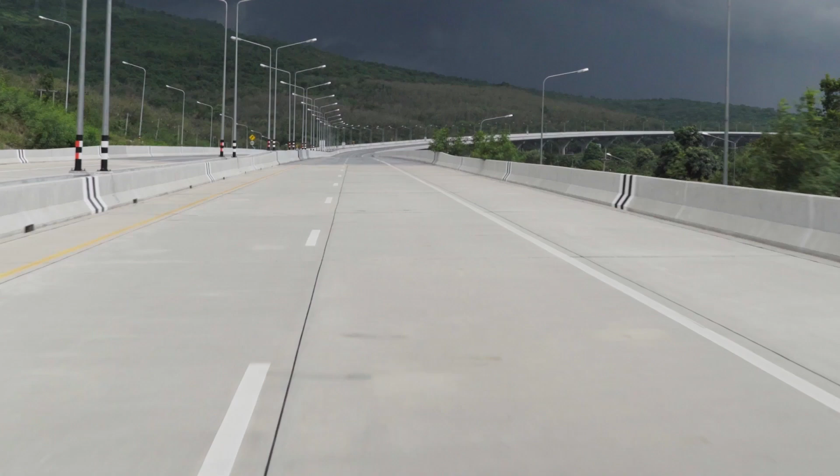The Department of Highways is the main agency that oversees the highway network throughout the country. Currently, the Department of Highways has almost 78,000 two-lane kilometer routes, consisting of approximately 70,000 kilometers of asphalt surface and around 7,600 kilometers of concrete surface, and only 62 kilometers of unpaved surface.

The Department of Highways takes into account the convenience and safety of road users. To be more precise, we focus on the smoothness of roads because it plays a significant factor in making road users convenient and safe.

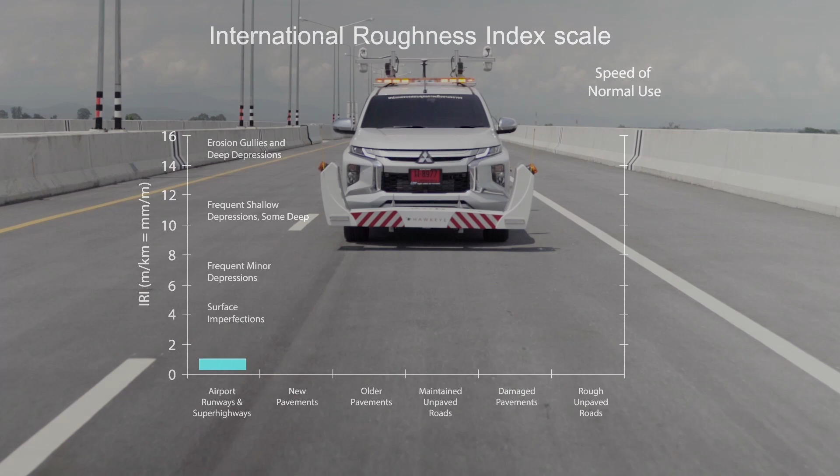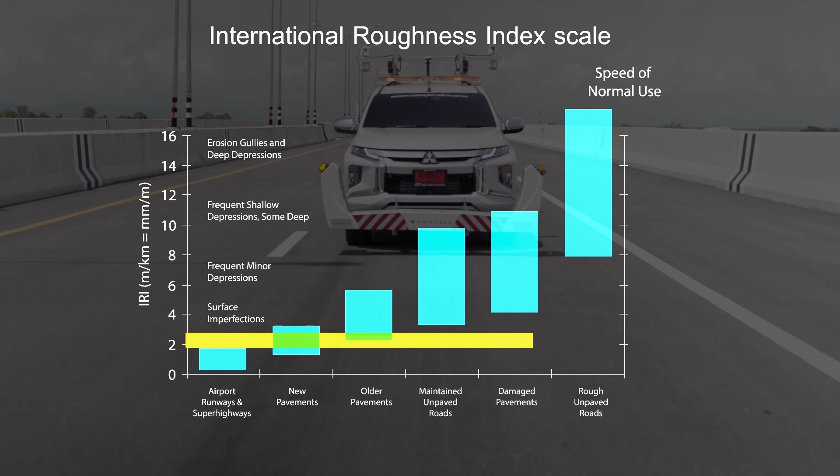The International Roughness Index (IRI) is an index used to determine the roughness of the road surface. It can indicate the overall surface condition of the pavement from the results of the total vertical level change divided by the total horizontal distance while driving. The IRI is very well known and used by many countries in pavement management and is also acknowledged by the World Bank.

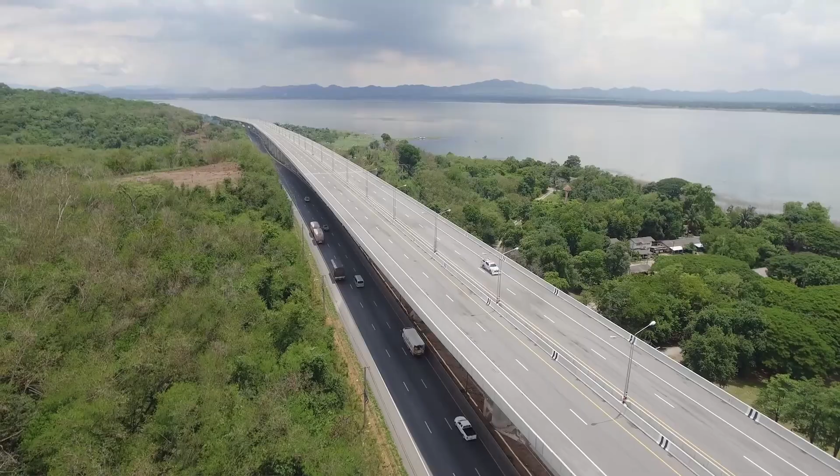Generally, IRI for newly constructed roads ranges from 1.5 to 3.5 meters per kilometer. The acceptable IRI requirements, however, vary from country to country. It depends on the policymakers and the budgetary allocation for road infrastructure. As for Thailand, the Department of Highways requires newly constructed roads to have an IRI not greater than 2 meters per kilometer for asphalt pavement, and not greater than 2.5 meters per kilometer for concrete pavement.

In order to measure IRI, an accurate and efficient instrument is required for such a mission. Fortunately, high-tech devices like the laser profiler are brought to inspect roads, which help us overcome former issues such as time-consuming inspection.

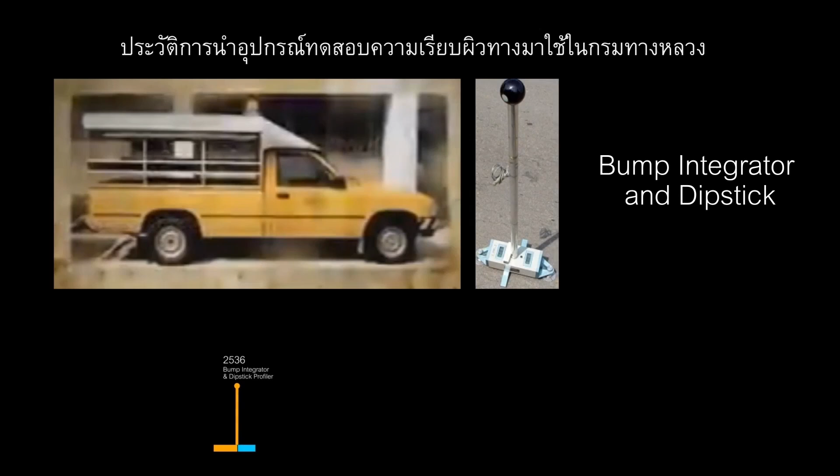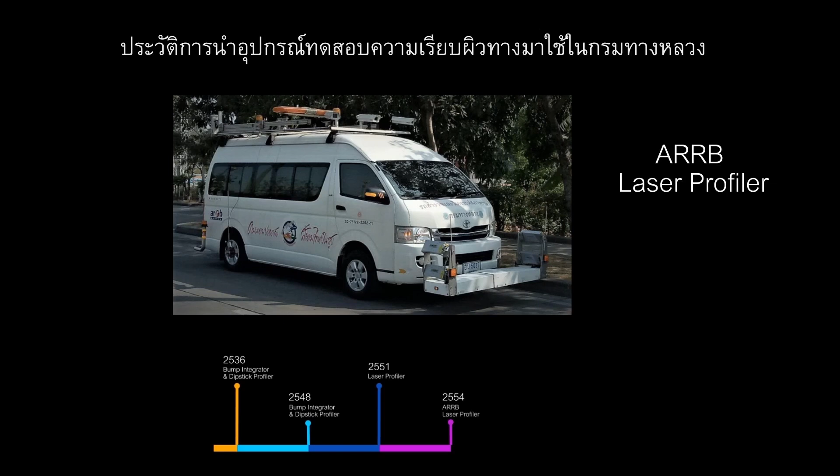Since 1993, the Bureau of Materials Analysis and Inspection has utilized equipment such as the bump integrator and dipstick profiler for surveying road roughness. The Class 1 laser profiler had just been invented in 2011 and has been widely used by the Bureau since then.

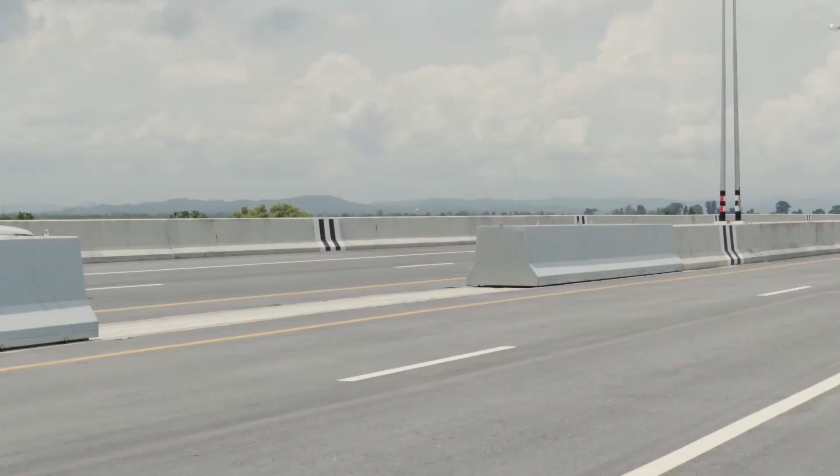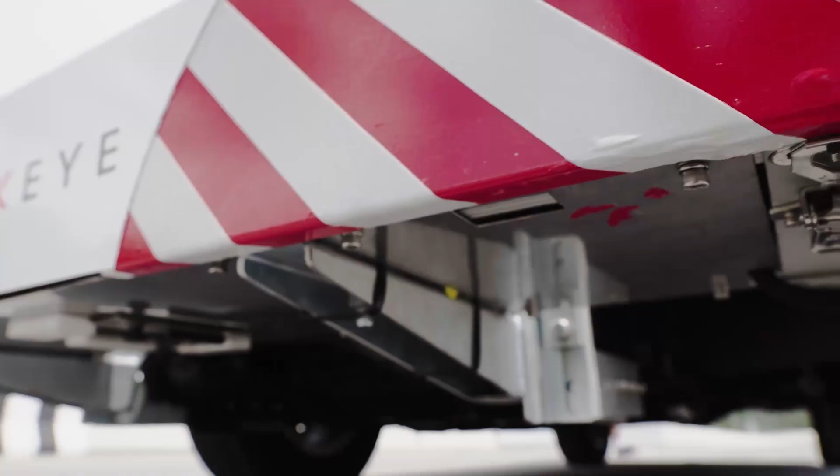The latest pavement surveying device developed in 2021 is from the Australian company ARRB. The Hawkeye 2000S series, which is a Class 1 laser profiler, is installed on a 4-wheel drive small truck, able to meet the needs of the Department of Highways effectively.

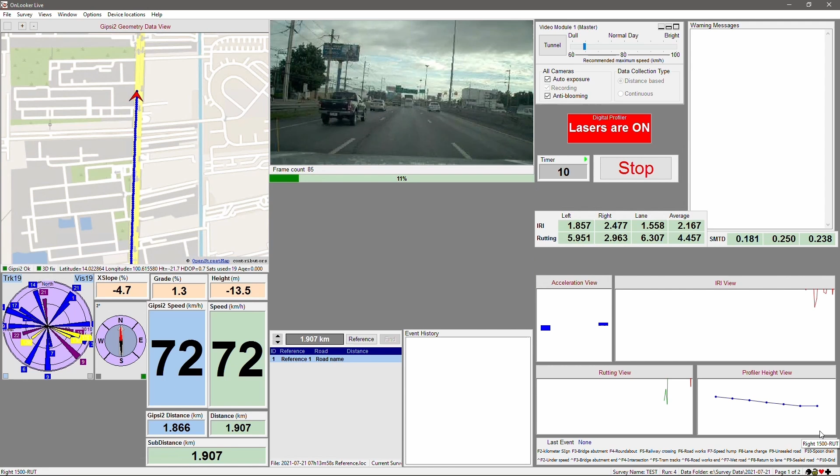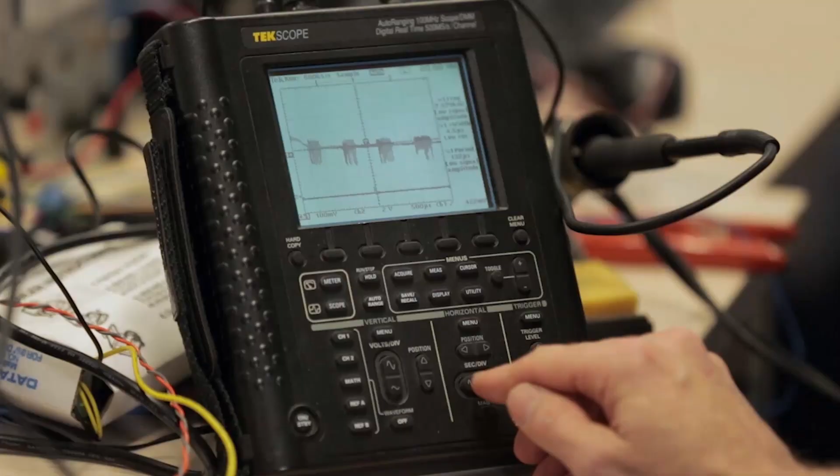The vehicle used to survey and analyze asphalt and concrete roads can record damage data on the pavement. It collects data for analysis using a laser profiler to measure pavement roughness in terms of the International Roughness Index (IRI), according to the American Society for Testing and Materials (ASTM), the professional association of science and technology that defines and establishes standards globally, namely ASTM E950, ASTM E1845, ASTM E1703.

The laser bar installed at the front of the car consists of an accelerometer and a laser, the Class 1 monitoring device with a beam size less than 1 mm. This device will shoot a beam of light onto the pavement to collect IRI, rutting, and MPD data.

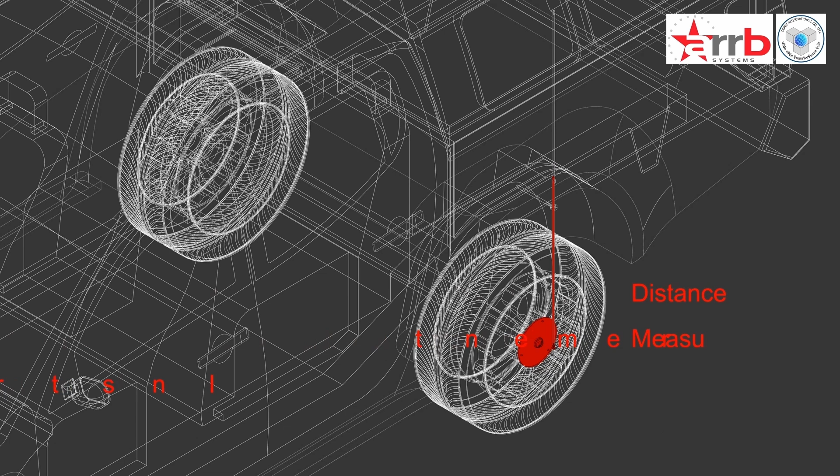This distance measurement instrument mounted on the side of the rear is used to measure speed and distance with a resolution of 2000 pulses per revolution and an error of 0.1% depending on temperature and thermal expansion.

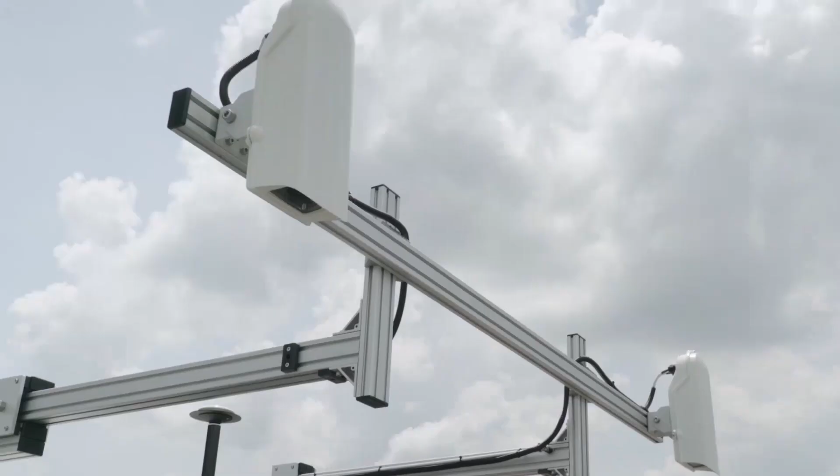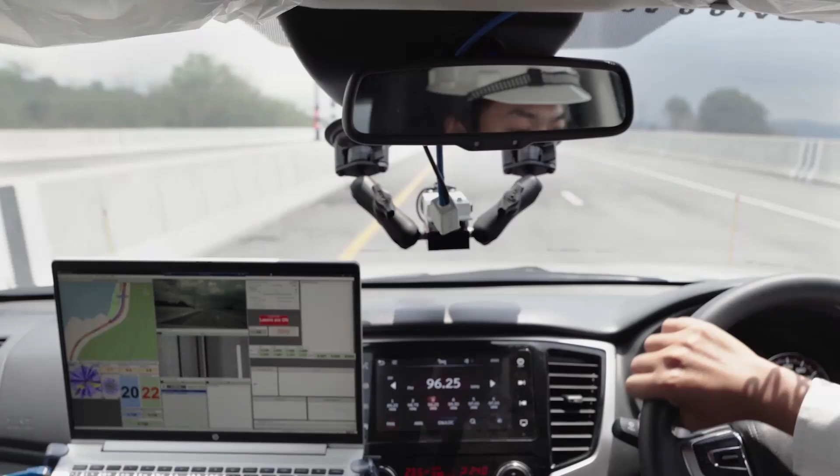There is a beam mounted on the top of the car's roof for a GPS receiver and a high-resolution rear camera to capture pavement failures such as cracks, potholes, etc. Furthermore, a front camera is set in the front of the vehicle for capturing high-resolution images of assets such as traffic signs, electric poles, milestones, and so on.

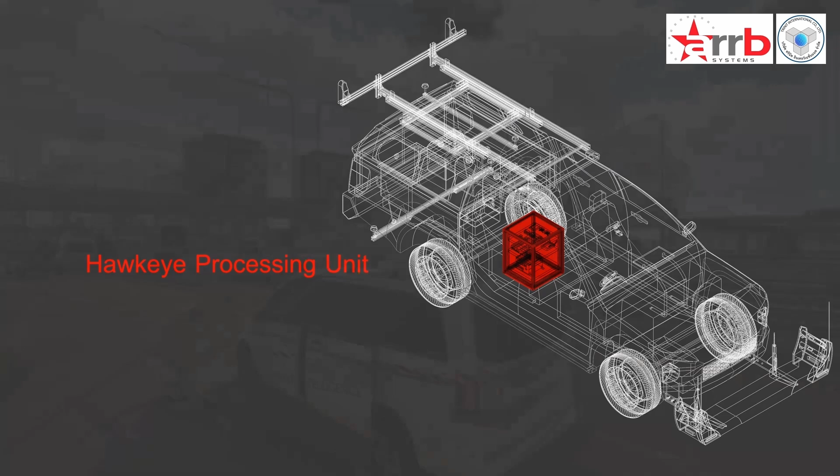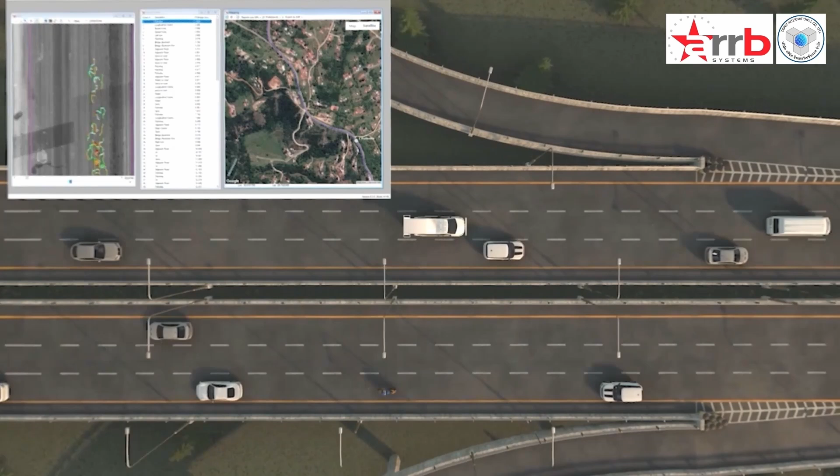The control cabinet is the device controlling the operation of the Hawkeye 2000S system. It collects data from each device to display the values via the program. Gipsi-Trac consists of two receivers used to receive signals for geocoding along the road surveys. It can also collect geographic information such as gradient, crossfall, and radius of curvature of the road.

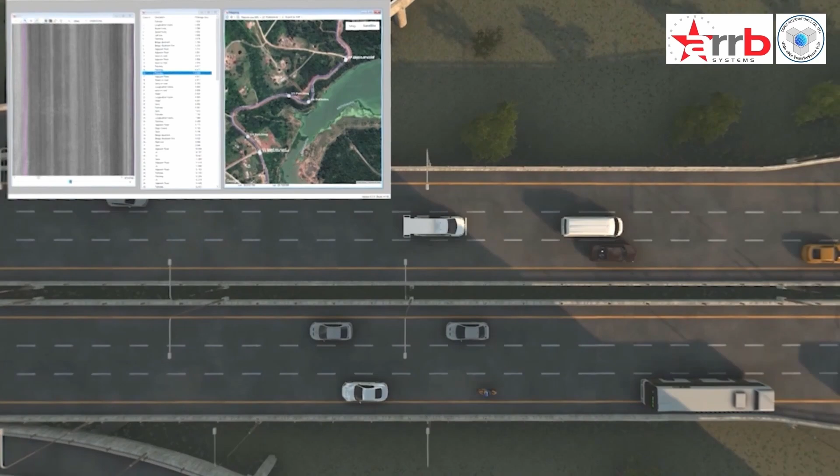When the laser heads shoot the beam of light to collect data, the cameras will capture images at every specified distance. Then, the data will be sent to the control cabinet for processing and then displayed on the screen.

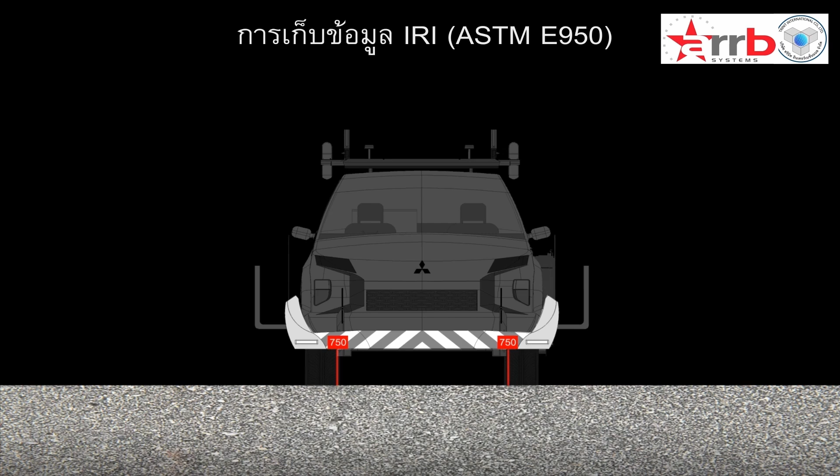According to ASTM E950, IRI data collection is a measurement and data acquisition standard using two Class 1 lasers in combination with a wheel-mounted accelerometer.

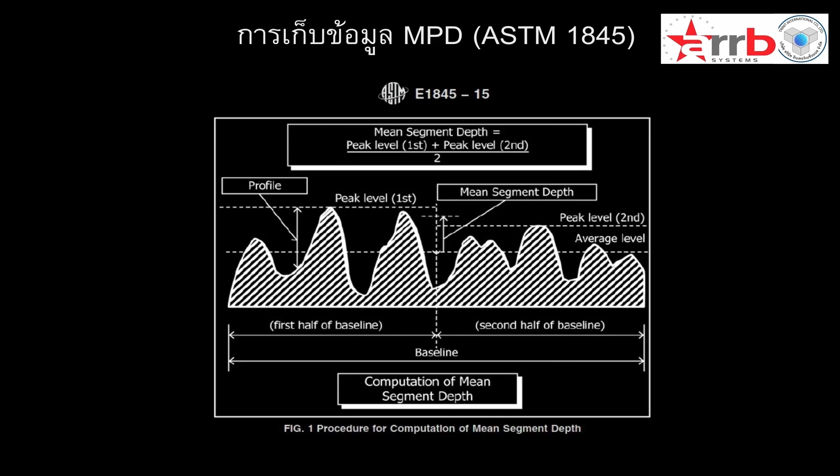With ASTM E1845, MPD data collection must have a laser beam size of no more than 1 mm, and survey data is collected every 1 mm by collecting data over a distance of 100 mm. The obtained values are then divided into two intervals, and the peak value is taken into account in the formula, which will provide the MPD value.

According to ASTM E1703, rutting data collection is data collection using the lasers. The obtained values from each laser were calculated to get the rutting values of the left wheel path and the right wheel path.

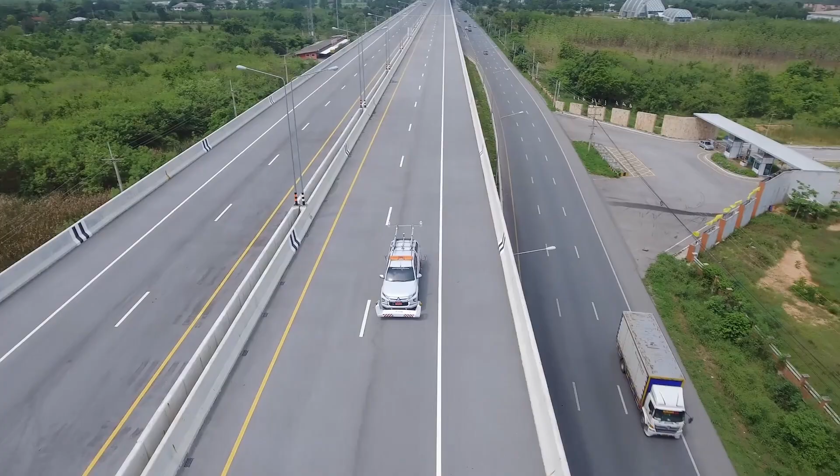Road geometry measurements are processed by the Hawkeye 2000 system equipped with Gipsi-Trac that measures road geometry data, namely gradient, crossfall, radius of curvature, and vertical curvature of the road, which will work as follows.

Firstly, gradient. The system measures the change in inertia from the 3-axis accelerometer in combination with a distance measuring device or DMI to convert it into a change in angle or percentage so that it can indicate how steep the road is at that point.

When the front of the vehicle is higher than the back, like a car going uphill, it will show a positive value. If the front of the vehicle is lower than the rear, like a car going downhill, it will show a negative value. The unit of gradient is in degree or percentage, depending on the measurement unit selected.

Secondly, crossfall. The system measures the inertial changes from the 3-axis accelerometer in combination with running direction measurements from the 3-axis angular velocity device to convert it into a change in angle or percentage.

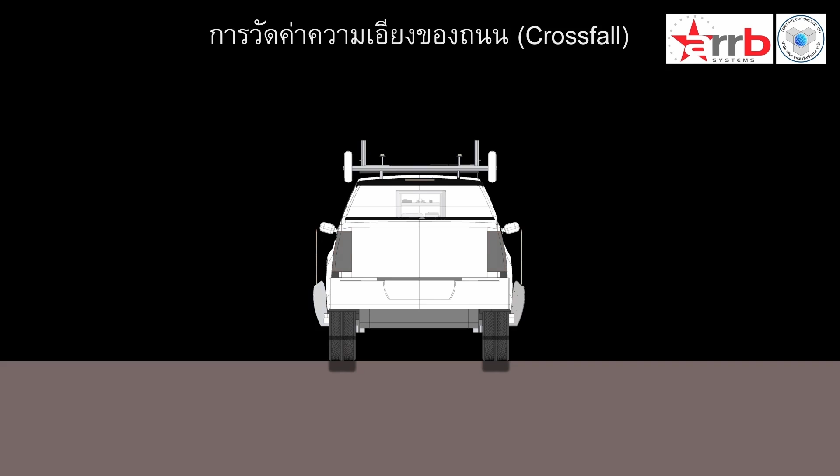For example, when a vehicle tilts to the right, so the left side of the vehicle is higher than the right, it will show a positive value. On the other hand, if the car tilts to the left, it will show a negative value as shown in the picture. The unit of crossfall is in degree or percentage depending on the measurement unit selected.

Thirdly, radius of curvature. The system measures the rate of change in running direction with the 3-axis angular velocity device to calculate the radius of curvature in meters. To illustrate, when the road curves to the right, it will show a positive value. Conversely, if the road curves to the left, it will show a negative value as shown in the figure.

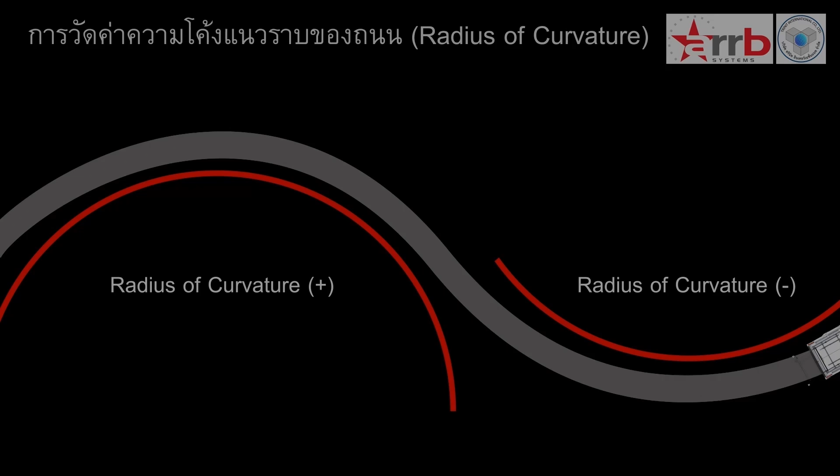And the last one, vertical curvature. The system measures the rate of change in road slope values with the 3-axis accelerometer in combination with DMI to determine the rate of change in vertical curvature. As for the unit of this, it's shown as a percentage per distance.

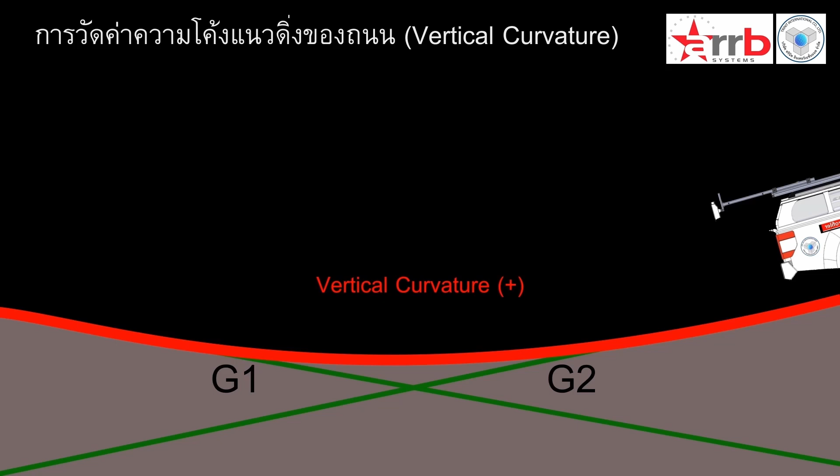When the road has an upturn curve, it will show a positive value. And when the road has an inverted curve, it will show a negative value, as shown in the figure.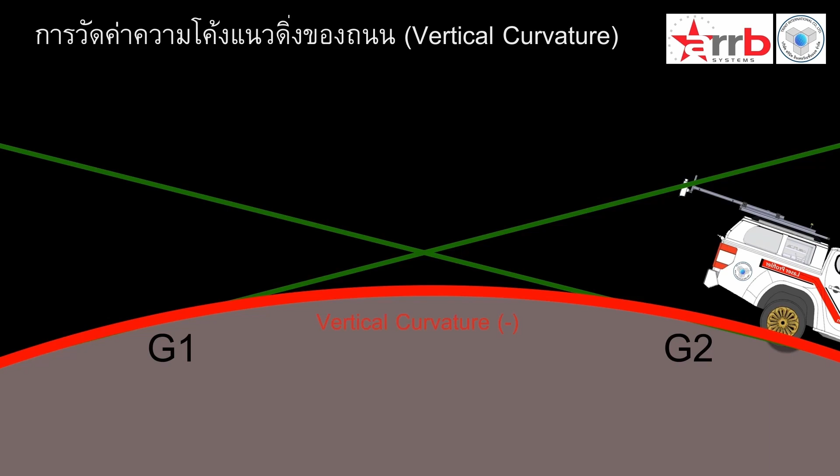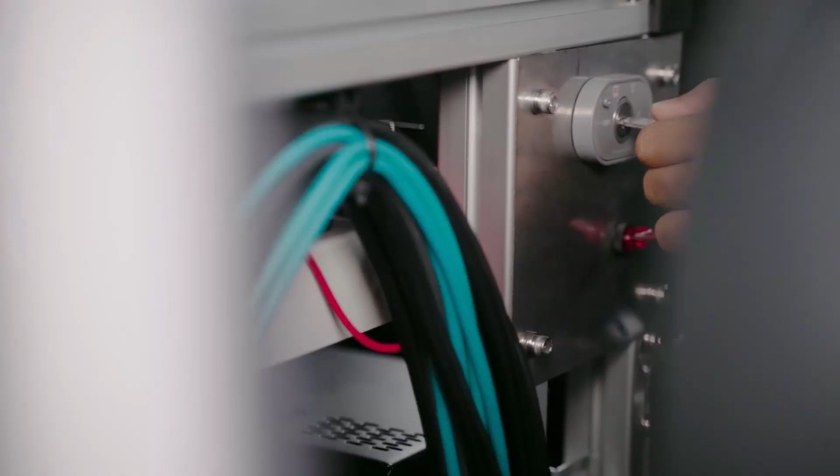To create safety for road users, the Department of Highways has a crucial duty to inspect newly constructed roads with testing tools that meet international standards like these technologies, and make sure that contractors construct pavements according to their standards so that the roads of Thailand will last longer and greatly reduce road maintenance.